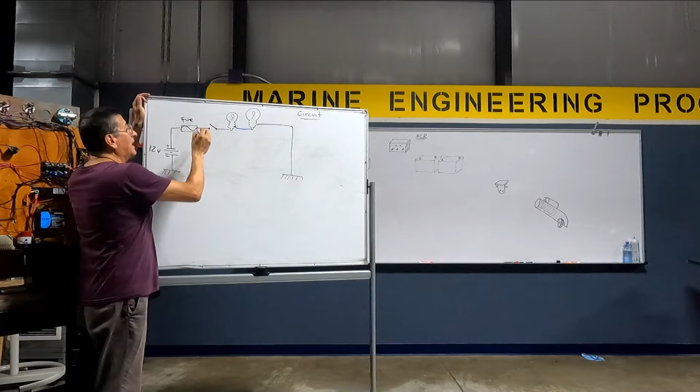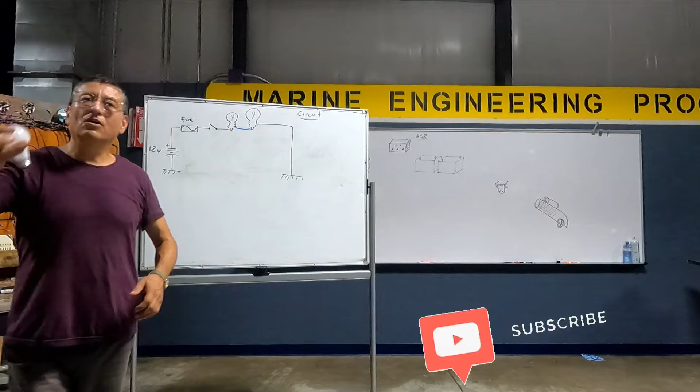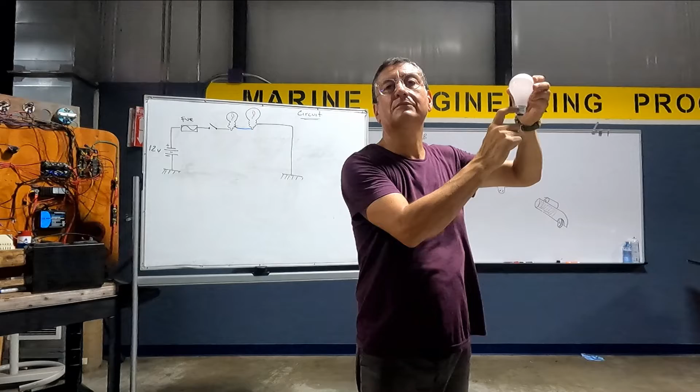If you check the light bulb, let me bring a light bulb and show you something. When you have a light bulb, always, always, always, the bottom is the positive, and the case here is the negative. Positive here and negative here. In the future, if it's for AC current, here is the hot line and this one is the neutral. Is it clear, my friends?

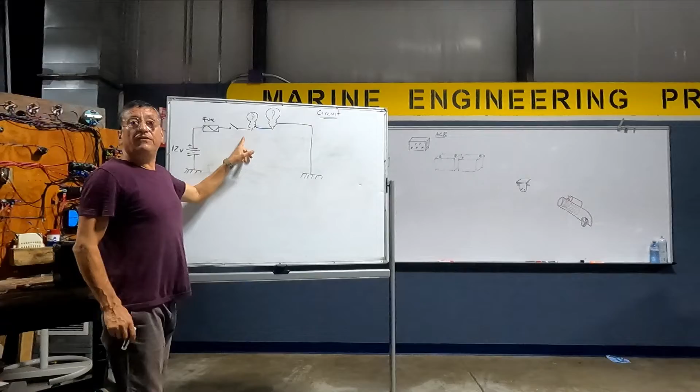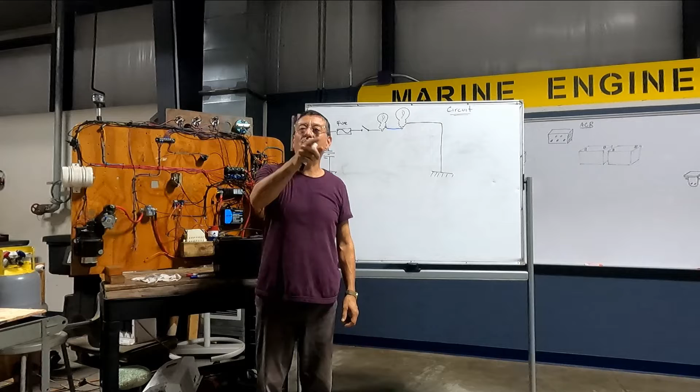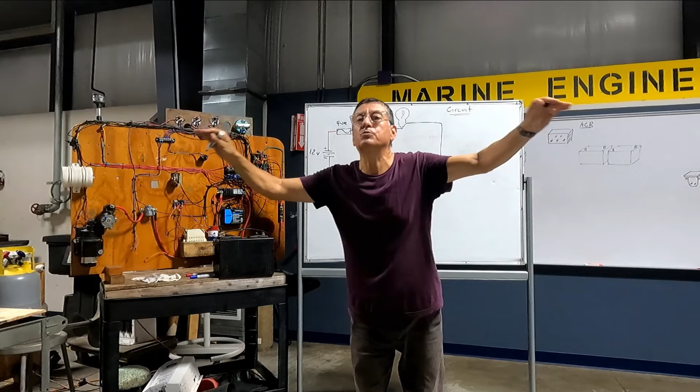The positive enters on the positive side of the light bulb, and I am going to connect two light bulbs in series. You remember when we connect batteries in series? What happened with the positive of the first one? Going to the negative, with the negative of the second one. The negative of the first one will be connected with the positive of the second one, and this is the cross cable. And after that, the negative of the second one goes to the ground. This ground and this ground is the same. When I mark ground in the circuit, it's the ground bus bar, in this particular case the negative bus bar. And the circuit is complete.

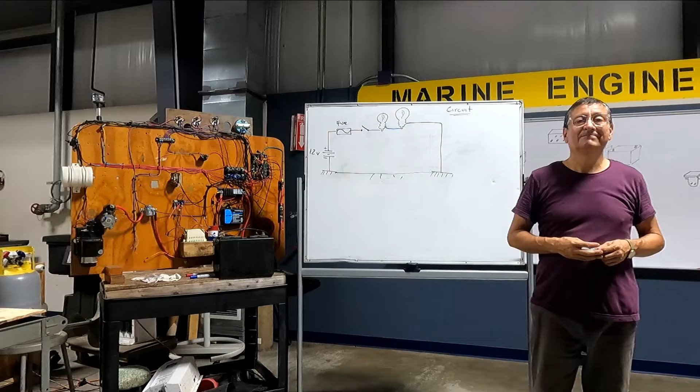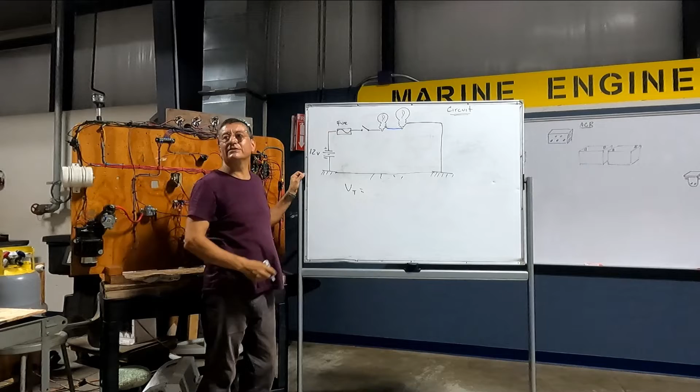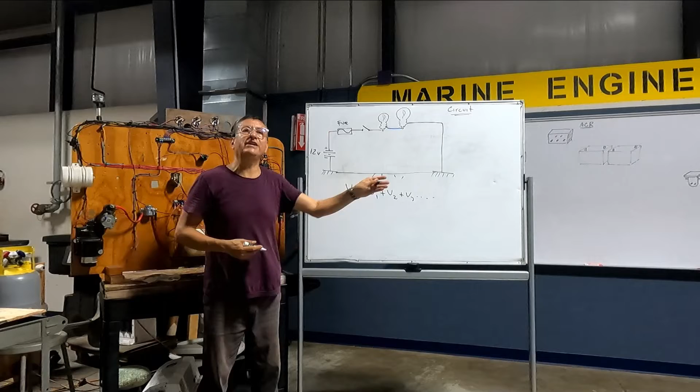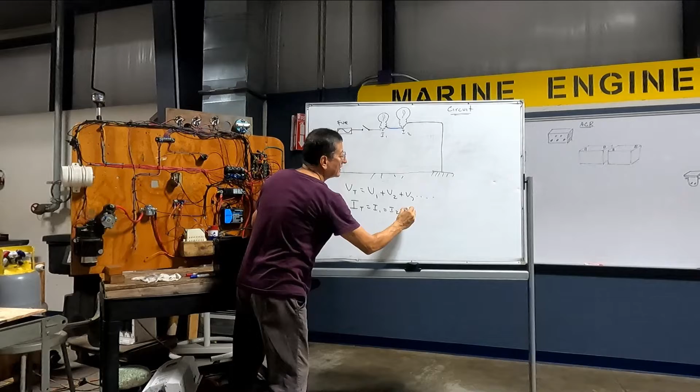What about the voltage and the intensity and the resistance in those series circuits? What about the total voltage in that circuit, in series? Increase. It's the voltage number 1 plus voltage number 2, in series the voltage goes higher. What about the intensity? The intensity is equal to intensity number 1, intensity number 2, and this is the total intensity. It's constant. This is the secret for when we solve series and parallel circuits in the future.

And what about the total resistance in that series circuit? This is resistor number 1 and this is resistor number 2. What about the total? You add it, you add it, you add it. This is the secret, this is the key when you solve a series circuit.

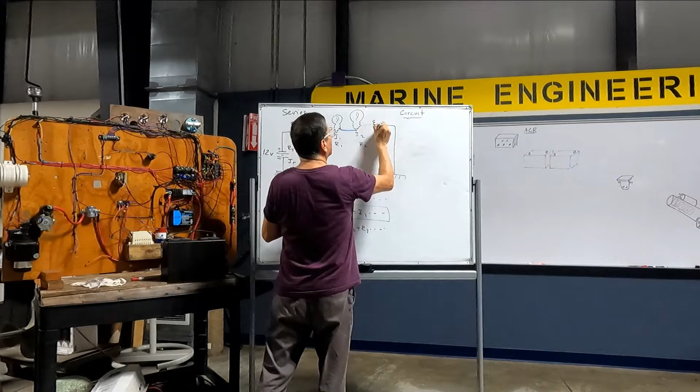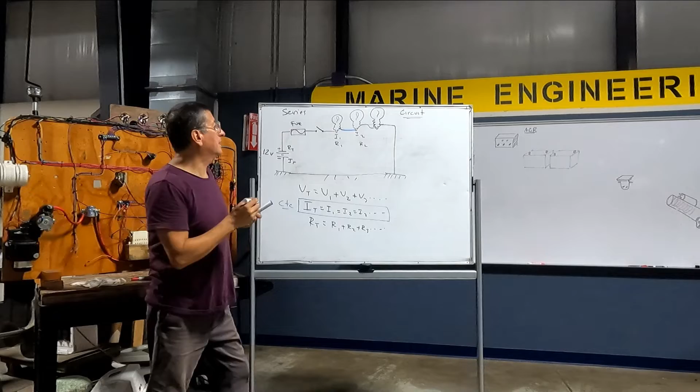The intensity is the same, constant, in series. This is the advantage when you connect elements in series. Suppose that I connect another one additional here, and once again, and this one is the ground. I have three loads connected in series.

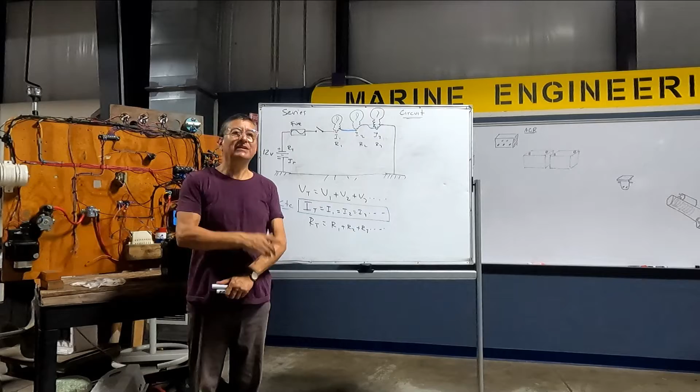What is the disadvantage of that circuit? What happens if, for some reason, this light bulb is broken? The rest of the circuit is broken. That's not good. This is like Christmas lights you remember? If one of the lights is broken, all the series goes out, garbage, because it's difficult to find in a million light bulbs which one is broken.

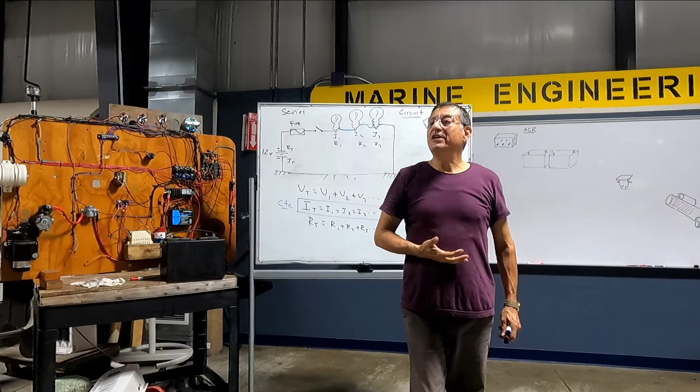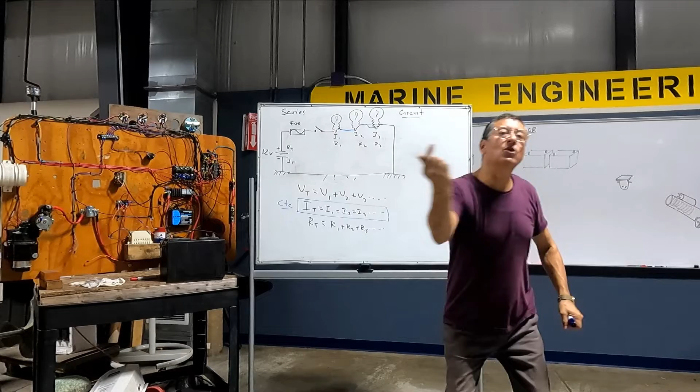What is the advantage of series circuit? The intensity of all the lights is the same. This is the advantage, the flow of current is equal, it's the same in the entire circuit. Don't forget that, my friend. This is the advantage of series circuit, the intensity, the flow of current is constant. I need that all of those lights connected in series receive the same amount of current. I need series.

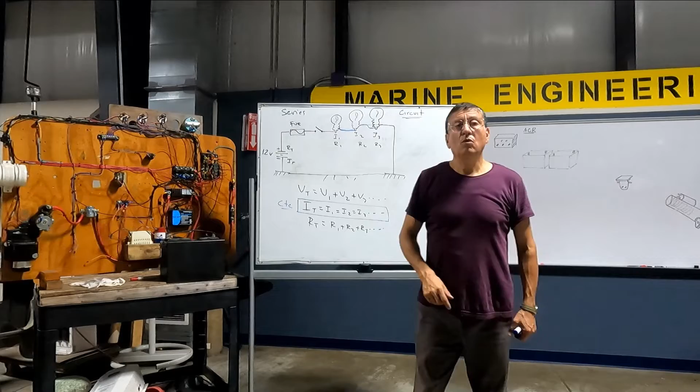Other advantage of the series connection, you remember when you connect batteries in series, what is the element that increases? The voltage. What happens in the morning with the engine of your car, of your boat? You want high voltage during the cranking. Immediately the engine starts, no problem, but you need in that moment high voltage. For that reason, normally for cranking purposes, you connect the batteries in series.

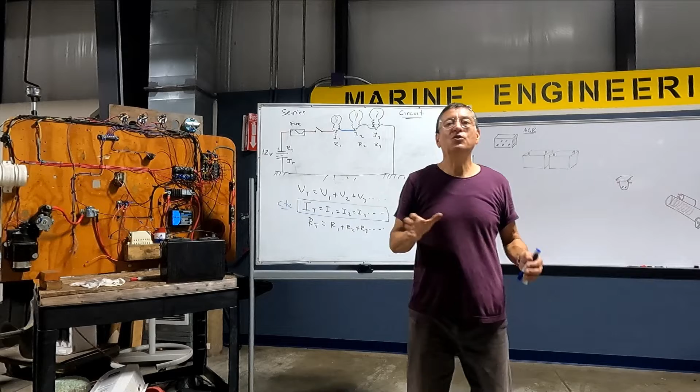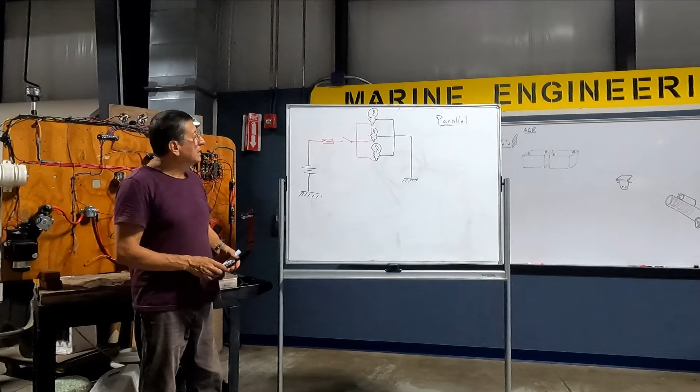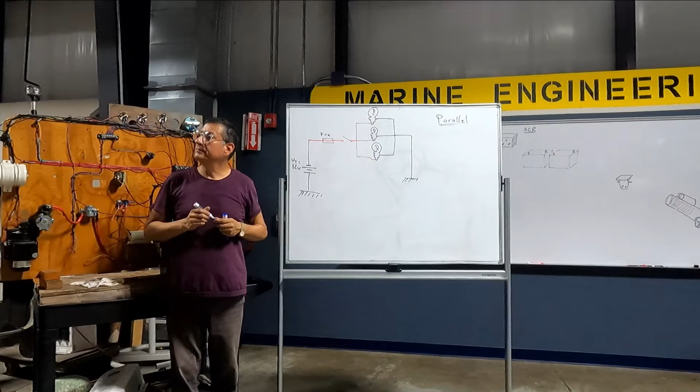All right, now we are going to check the same connection in parallel. This is the battery, this is the total voltage, it's 12. This is the fuse, this is the switch, the interrupter. Those are the loads, and this is the return to the ground.

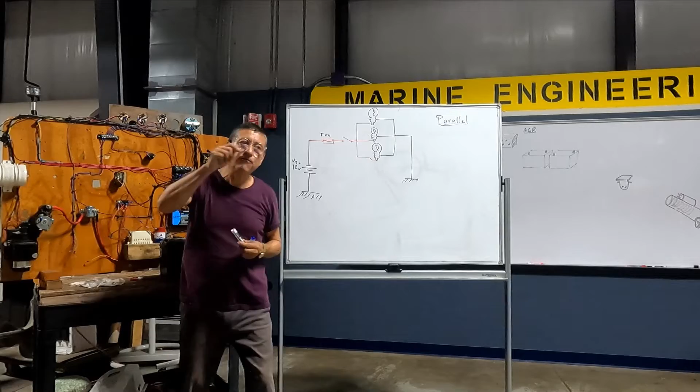Be careful with the return, be careful with this one. The majority of the problems, practically 90% of the problems that I receive every day, phone calls related with electricity, is no ground, no return. Hey, the ground is disconnected. No ground, no return. Be careful with the ground. People connect the positives and forget the negative.

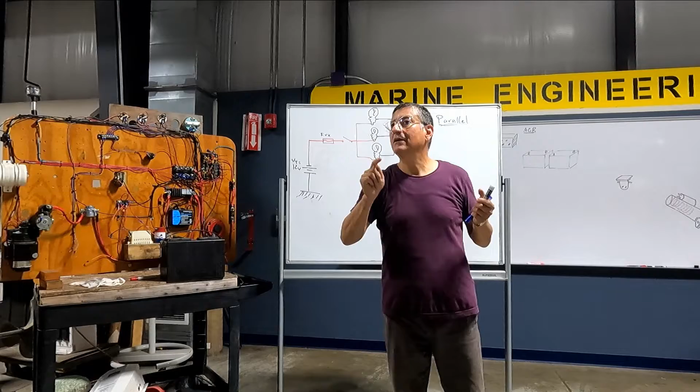Always, always, always, before you start, check if my ground is properly connected. Okay, we are going to check what happened in this parallel circuit. What happened with the voltage?

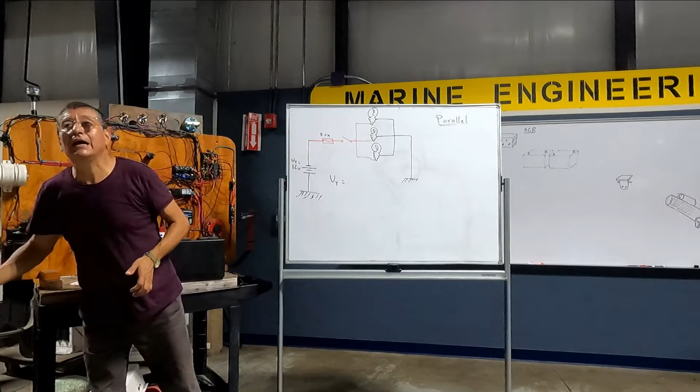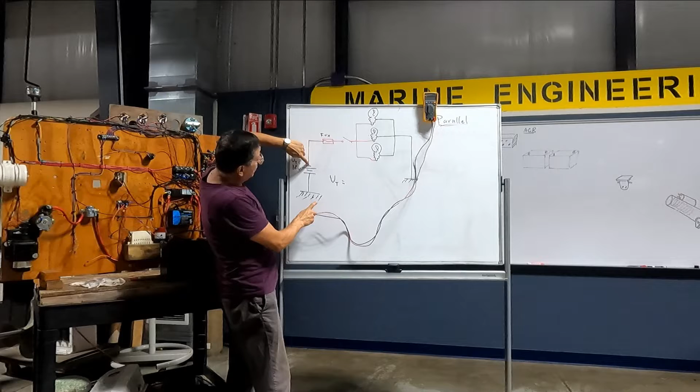Look, the voltage here, here, and here should be—if I check voltage normally in between the positive and the negative. If this is the voltage of the battery, 12 volts, in between the positive and the negative I have 12 volts. In between this positive and this negative is the same, I have 12. 12, 12, 12. Ah, the voltage in parallel is constant, it's the same.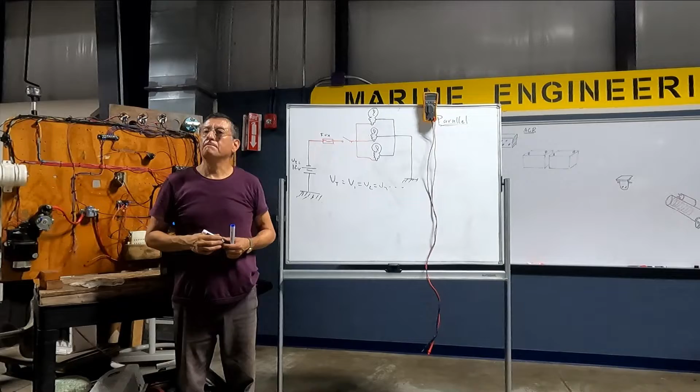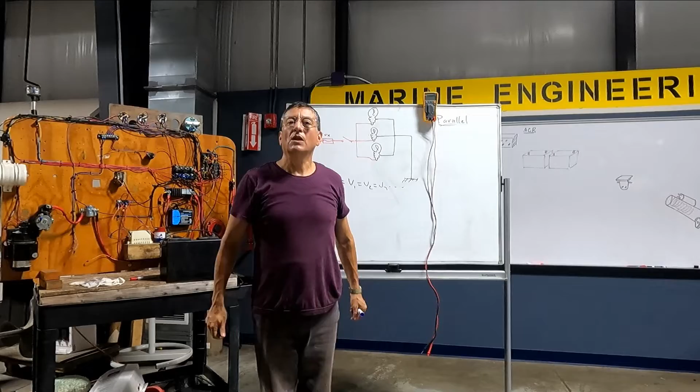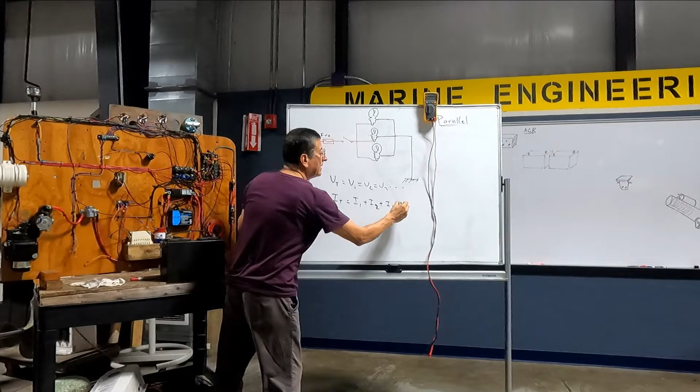That's the most important part. In voltage, in parallel, when I connect batteries in parallel, circuits in parallel, the voltage is constant. What about the intensity in that parallel circuit? It increased. The intensity is going up. Increase.

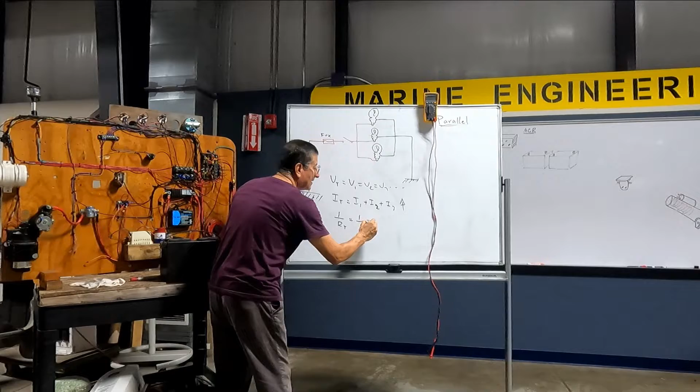The tricky question is, what about the resistance in parallel? It's the opposite. The resistance decreases. Right now we are going to talk and check an example.

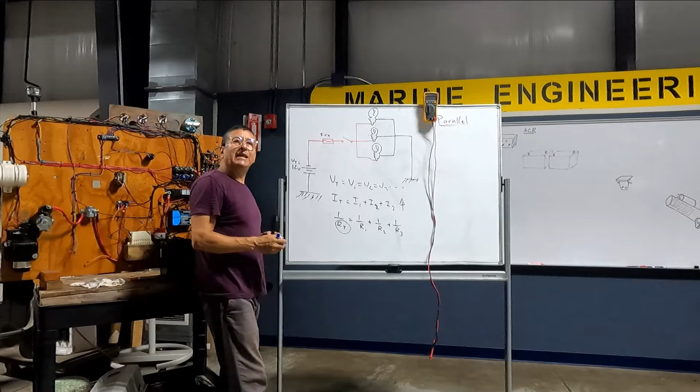In parallel, what is the element that is constant? Voltage. Great. In series, what is the element that is constant? Intensity.

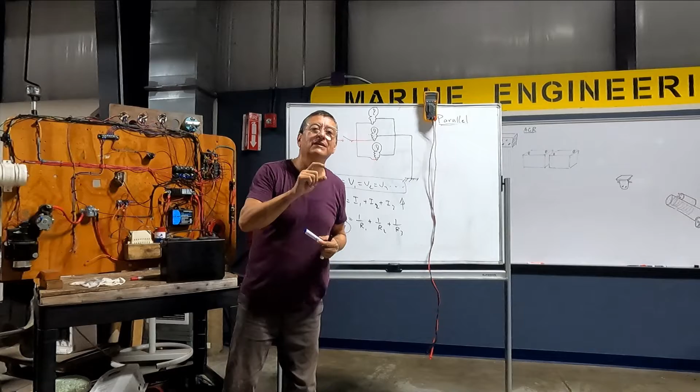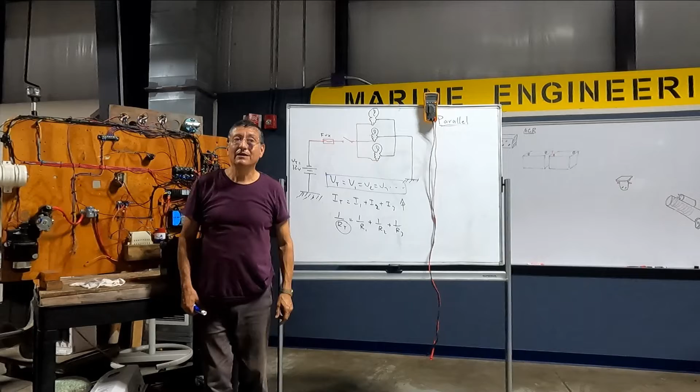Look at this. In parallel, the voltage is constant. But what about the intensity? It increases. Ah, okay, this is great. In some cases I need more intensity. What is the other equivalent to intensity? Amperes is the unit, but it's more flow, more amount of electrons flowing through that point.

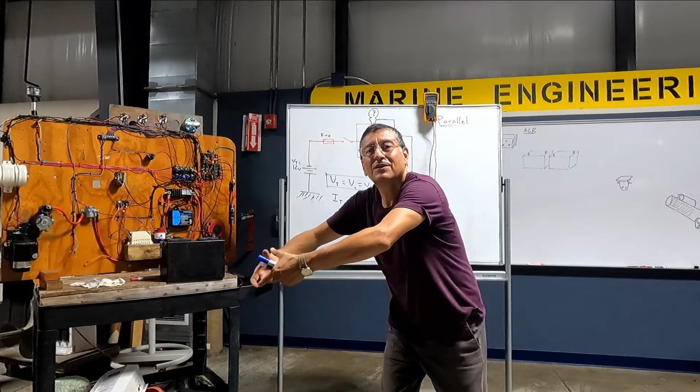What is the intensity in fluids, in hydraulics? The unit is gallons per minute, gallons per hour. More gallons per minute through that point. In some cases I need more flow—more flow of water, more flow of electricity. I need to connect in parallel.

I need more voltage at the beginning, I need to connect in series. Depend on the situation, you need more volts at the beginning, or more amps during the day.

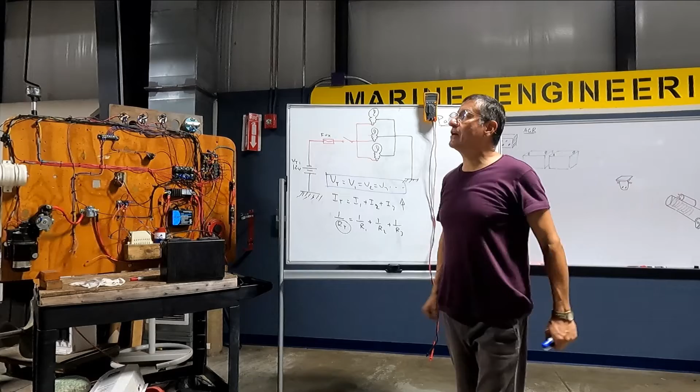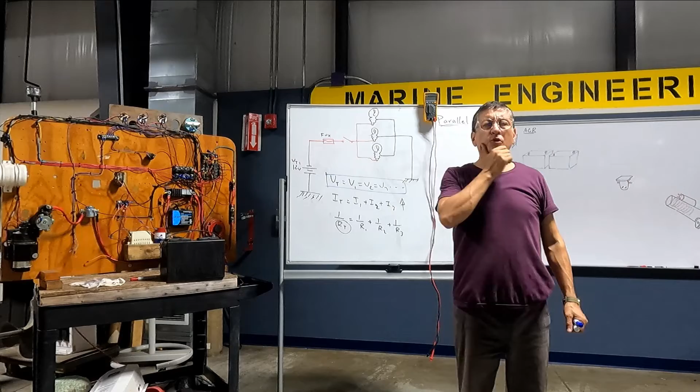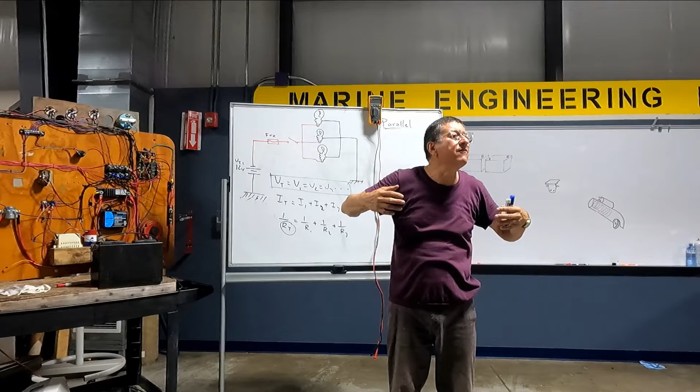I have a question: what about the house battery banks, the service battery banks? How should those batteries be connected, in series or parallel? In parallel, because I need to collect the maximum amount of amps and deliver those amps during the day—a lot of amps.

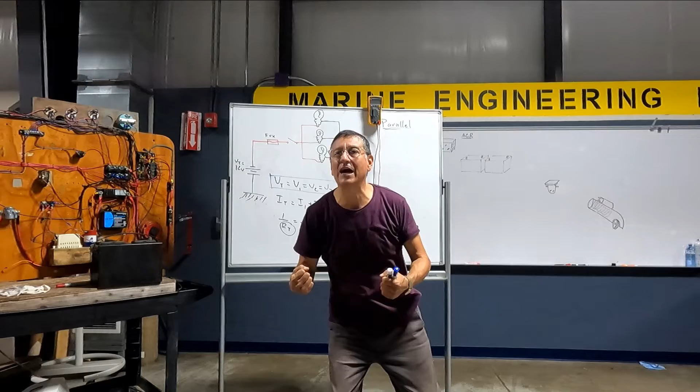How should the batteries be connected for cranking? Series, because I need a jump or high voltage at the beginning. How should the batteries be connected for the bow thruster? Series, because you need a jump for 10 seconds, and that's it.

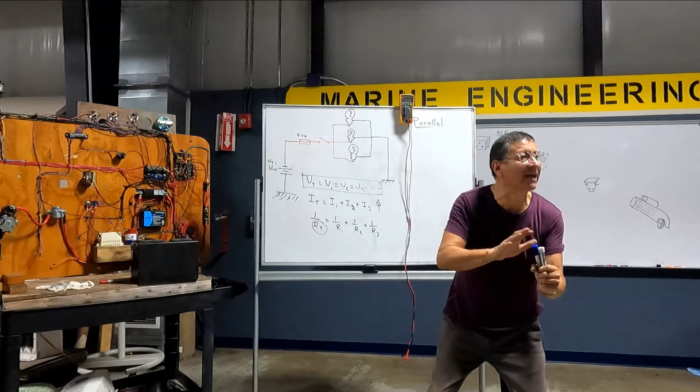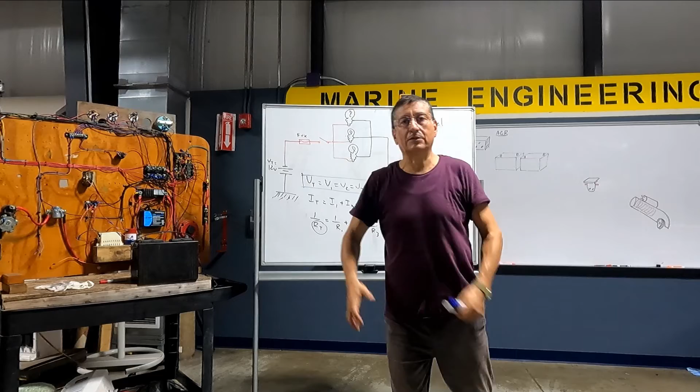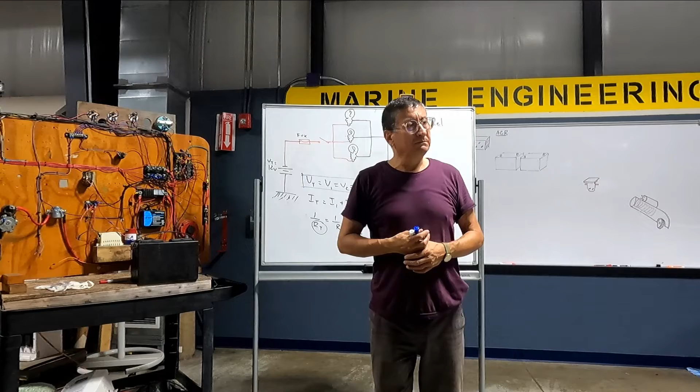In some situations I need more amps, parallel, or I need more volts, series. Simple, not difficult. Okay, we are going to try to solve it—a couple of circuits in series and a couple of circuits in parallel. I am going to show the secret to solve those circuits easily.

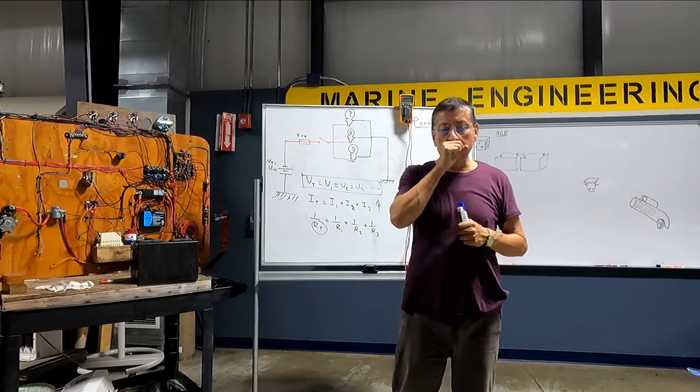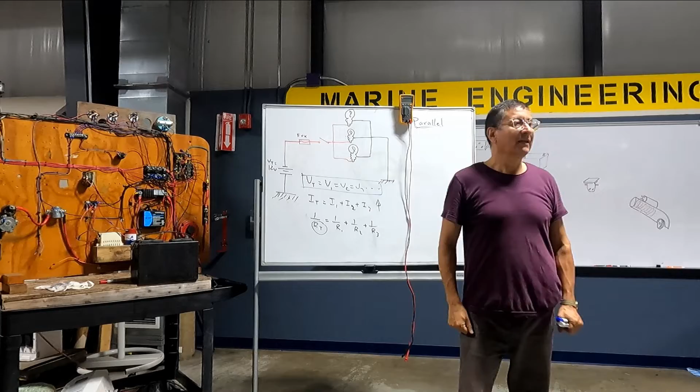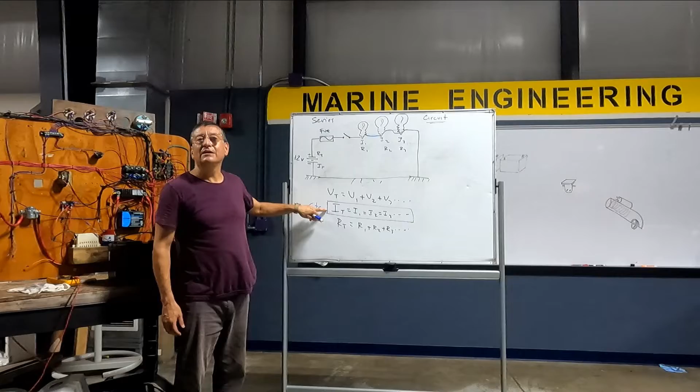The secret is basically: think, that circuit is series. The most important thing to remember in series is that the intensity is constant. If I find the intensity at any of the points, I have the intensity in the rest of the circuit. In series, don't forget that the intensity is constant. The voltage goes up, and the resistance goes up. That's the magic part of those circuits.

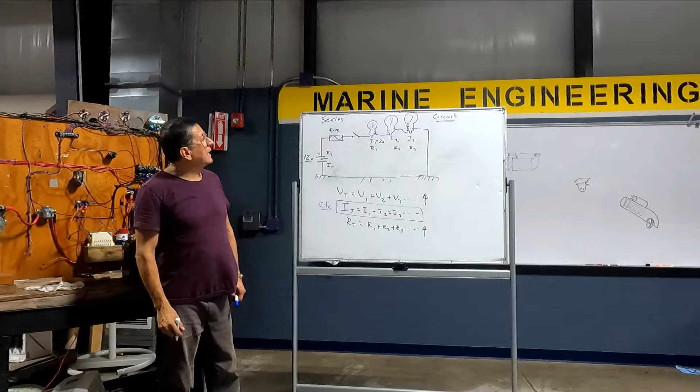Okay, I have a question. Look, guys, I say that the total voltage is 12. I say that the intensity number 1 is 2 amps. And I say that the resistor number 3 is 10 ohms. I want to calculate the rest of the elements.

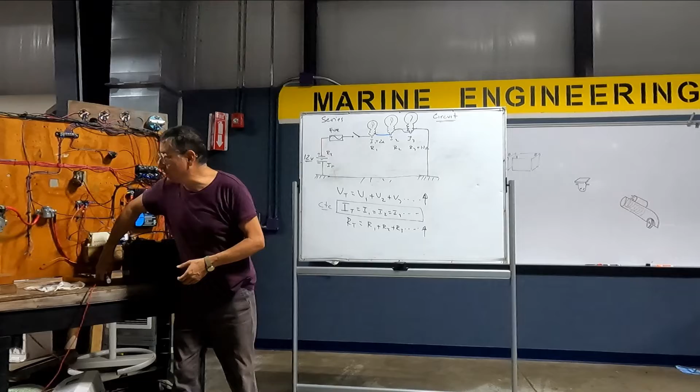What is the secret when you try to do those examples? Create a table, one table like this. Don't forget the table—the table is the magic key to solve those circuits. I am going to copy total voltage, total intensity, total resistance, total power, and we are going to solve it: voltage 1, intensity 1, resistance 1, power 1, voltage 2, intensity 2, resistor 2, power 2, and the same with voltage 3, intensity 3, resistor 3, and power 3.

Okay, what is the information that I have right now? I know the total voltage. How much is that? 12. It's 12. What other information do I know? 2 amps, intensity 1 is 2 amps. And what other one? The resistor. Resistor number 3, 10 ohms. And I want to know the rest of the circuit.

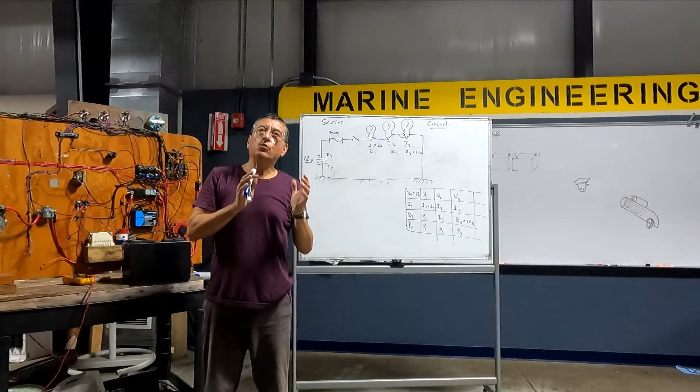If you have the table, it's too simple. And do you know what circuit this is, series or parallel? What type of circuit is this? Series. It is series. What is the magic key?

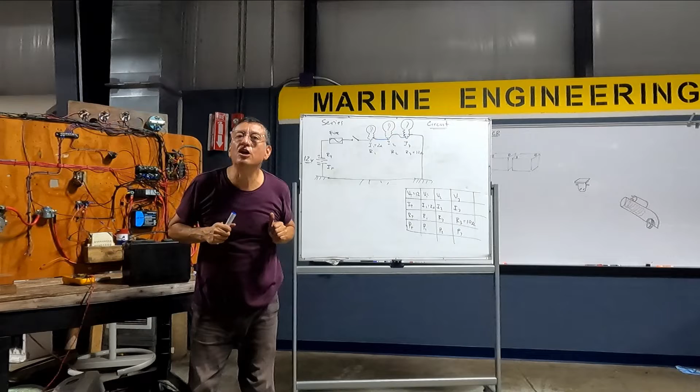Intensity. What is constant in series? Intensity. I know the intensity at any point? Yes, in point number 1. What happened with the intensity in the other points? It's the same. This is 2, this is 2, and this is 2.

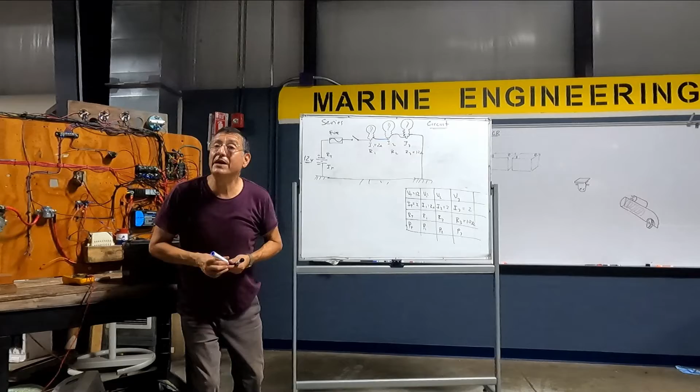Remember that always, when I try to solve a circuit, I need to remember 2 magic formulas. The voltage is equal to... yes or not? Yes. And the power is equal to... with those 2 magic formulas, you solve it on this table.

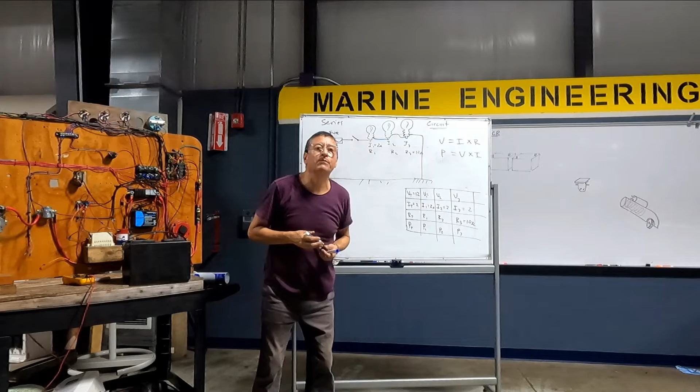Okay, according to this, right now I have values in some parts. Can I complete the table right now with that information? Yeah. Okay, what happened with the total resistance? I know the voltage and I know the intensity. How much is the total resistance? 6. It's 6.

What about the total power? 24, it's voltage times intensity. It's 24 watts. Okay.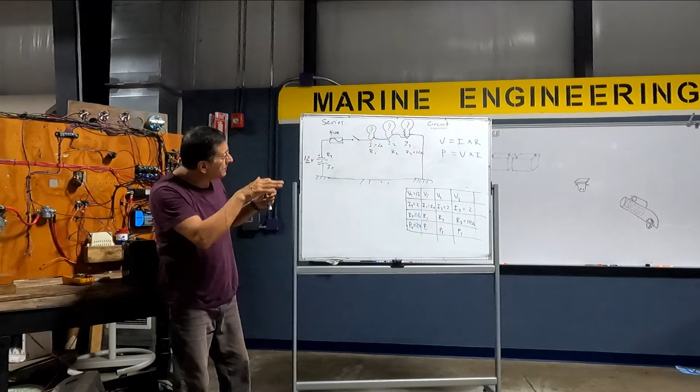What other point can I calculate? Voltage number 3 is equal to 20. Power 3 is 40.

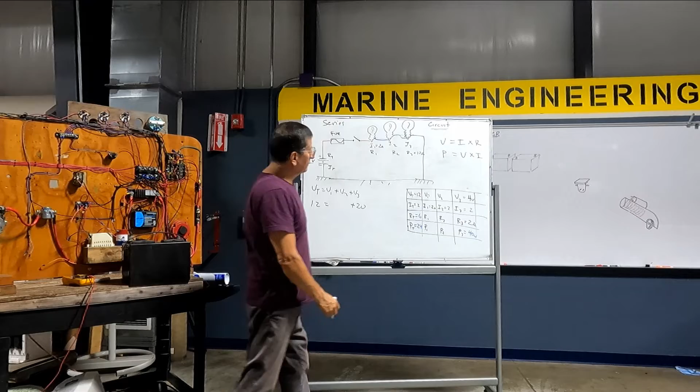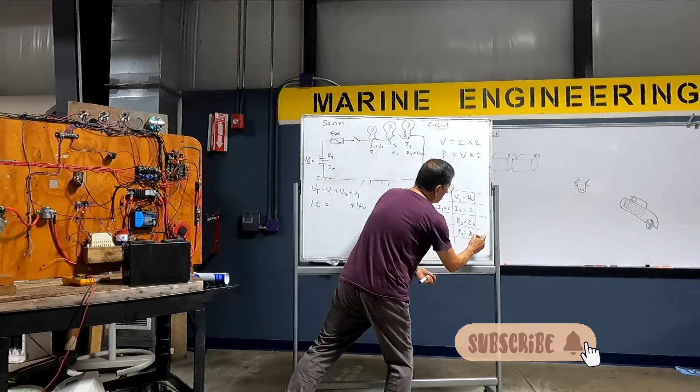What other point can I calculate right now? We are going to put, for example, 2 ohms here. What happened here with the voltage? 4 volts. Then the power: this is 4 volts, so the power is... voltage times intensity, 8. Wait, is that watts, 12? No? I'm tripping. Okay, alright.

And okay, good. Now, what about the total resistance? The total resistance is 6. It's equal to resistor number 1 plus resistor number 2 plus 2 ohms. Okay, and what other information do I have?

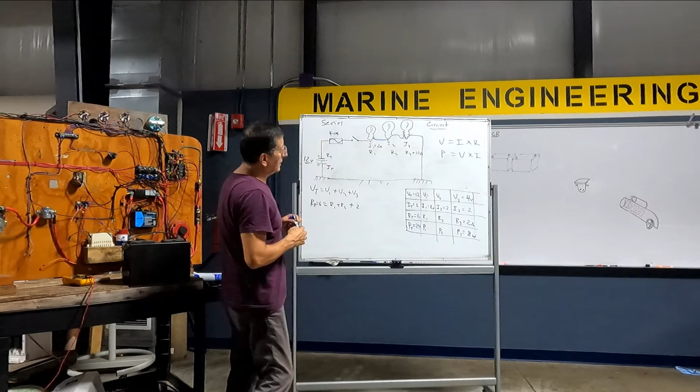Only the voltage number 3 and the power. Probably I need information about another voltage, no? I need information about voltage number 1. It's 3 volts. Okay, this is 3 volts. What about resistor number 1? Now with that information I calculate this one, it's 1.5.

1.5. Now it's easy because 6 should be equal to 2 plus 1.5 plus 2.5. And now with this and this, 2.5 times 2 is equal to 5. Okay, and the rest is easy: 3 times 2 is 6, and 5 times 2 is 10. And the table is complete.

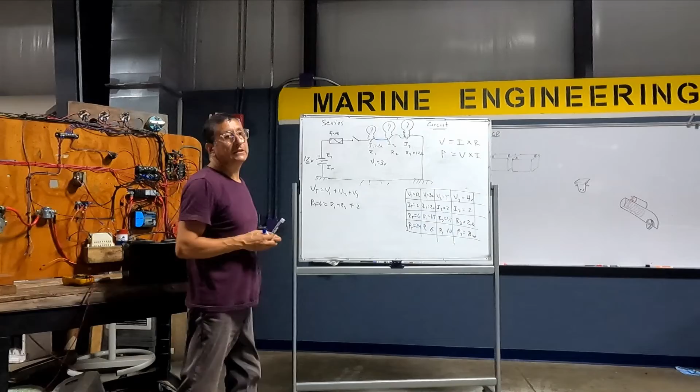No? We are going to solve another one. For parallel, we are going to do the same. Suppose that in this particular case the total voltage is 20.

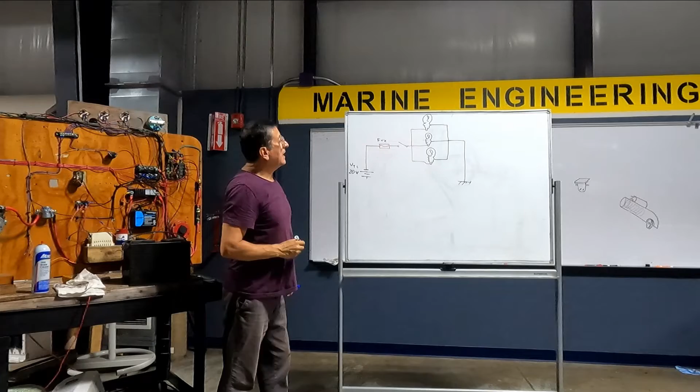And voltage 1 is equal to 6 volts. And intensity 1, resistor number 1. Voltage 2, intensity 2, resistor number 2. Voltage 3, intensity 3, resistor number 3. Suppose that intensity number 2 is 1 amp. And suppose that resistor number 3 is 2 ohms.

We are going to try to solve the circuit. We are going to create the table. What information do I have? Total voltage is 20. Intensity 2 is 1 amp. Voltage 1 is 6 volts. Oh no, sorry, power. Resistor number 1 is 10 ohms. And what other information do I have? Resistor 3 is 2 ohms.

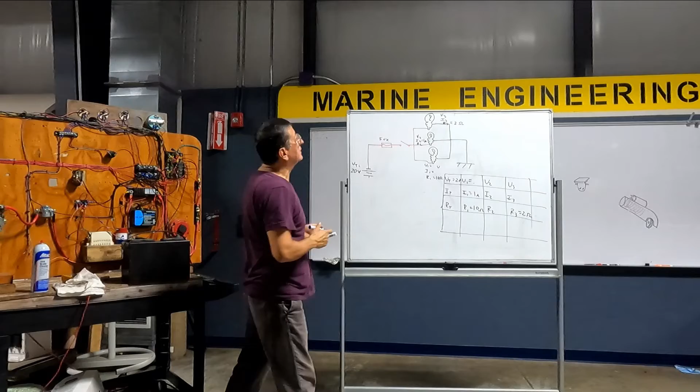Okay, we are going to check if with that information I can solve the rest of the circuit. This is a parallel circuit. What is the secret when it's parallel? Voltage is constant. What is the meaning of that? All 20 volts, and this is 20, no?

Okay, great. And with that information... wait, no? Yeah, there's still two. This one is 2. And what about this? That's 10. This is 10. And what about this? 10.

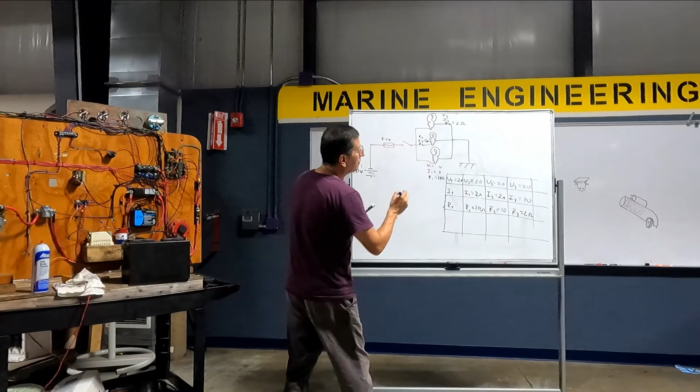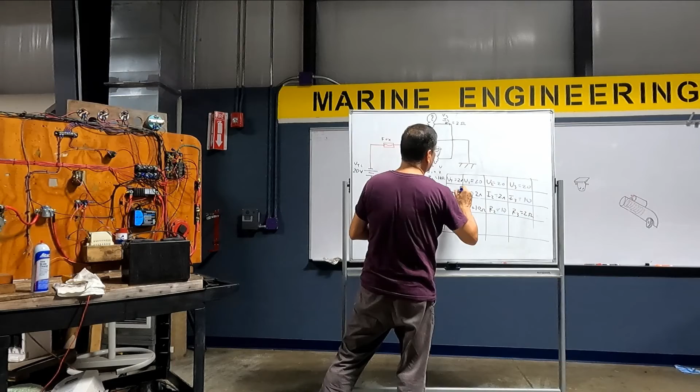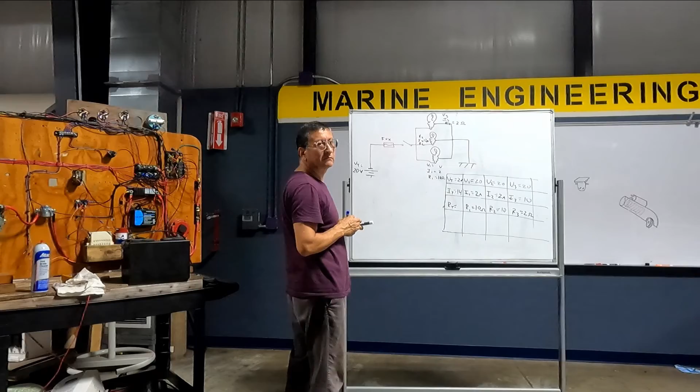What about the total? Look, what about the total? 14. This plus this plus this is 14. And what about this? 20 divided by 14, how much is that? 1 point something, no? 1.42.

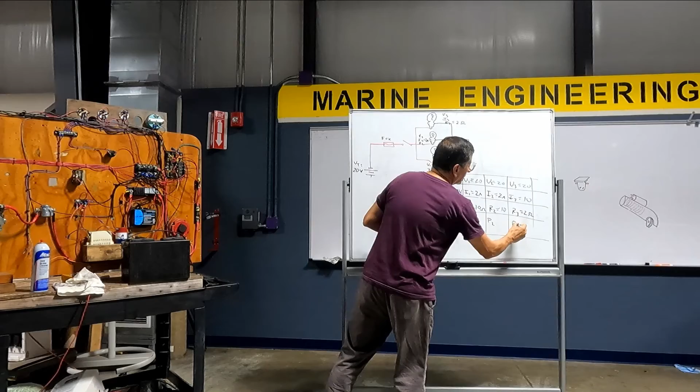And yeah, you can calculate the power, no? You see, the secret is the table. With the table, you can advance.

Difficult, my friends? Difficult? You need practice. Practice.